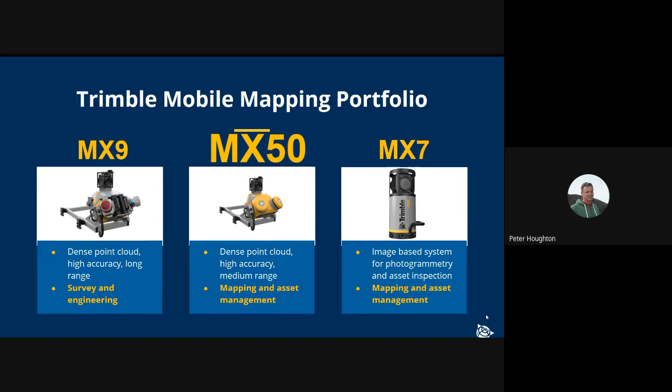So this is our new product. The Trimble MX50 was launched on the 12th of July, and we're going to specifically focus on this product during this session.

So just a little bit more about our portfolio. Trimble has a portfolio of mobile mapping products with a variety of applications and price points that we believe would be interesting for many different kinds of users. If you look at the application, as mentioned previously, MX9 is for high-end surveying and engineering, the MX50 for asset management and mapping, and the MX7 for imaging for those people that want to collect a type of street view kind of workflow.

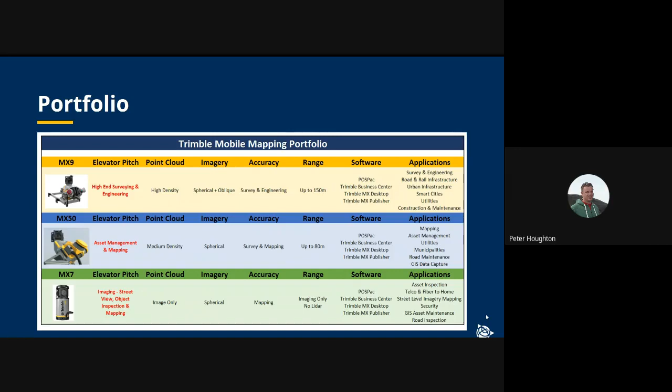If you look at the columns just in from the right hand side, it indicates our software and workflow for each of these products, and an important point to make is that we have the same workflow across our portfolio.

So no matter which product a customer selects, the workflow is the same. This is very important because it means that, for example, somebody that has an MX9 and would like to add an MX50 to their fleet doesn't need to change their workflow. It's exactly the same as it was with an MX9 or indeed an MX7.

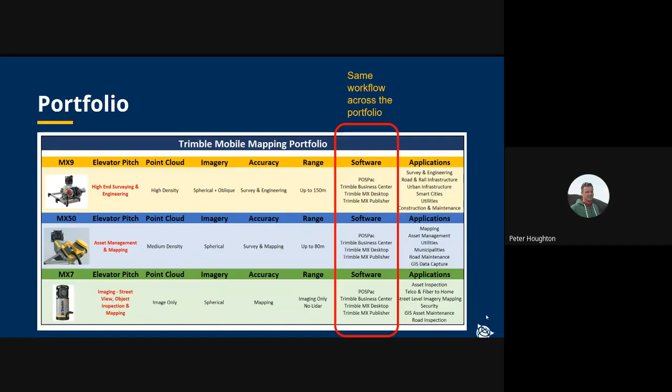So a little bit more about the workflow. We consider 4 steps in the whole field-to-finish workflow: capture, process, extract, and share. These are the 4 steps in our workflow, and just to indicate what that means in practical terms.

In the field, we have our TMI field capture software for all 3 products. The customer simply needs to connect to whichever system it is with the mobile device, usually a tablet, and there's a very simple process for connecting with a web browser to the system and capturing the data required in the field.

That data, once the mobile mapping mission is complete, is transferred to the office, and it goes primarily to begin with in Trimble Business Center, or TBC. In that software, people can do all the basic stuff they need to do with the raw data, so they can process the trajectory, generate point clouds, do things like registration, run-to-run or registration to control points, point cloud colorization, image blurring, and then export the processed data.

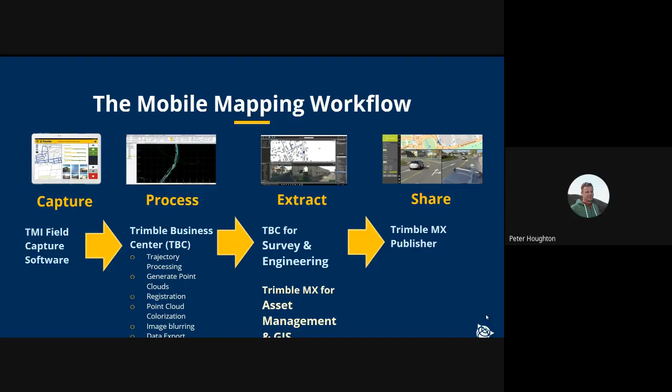So I come back to these 4 steps again: capture, process, extract, and share. Let's just have a look at that in a bit more detail with some examples.

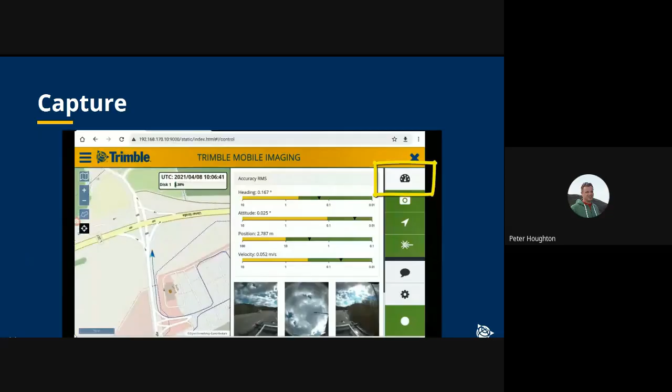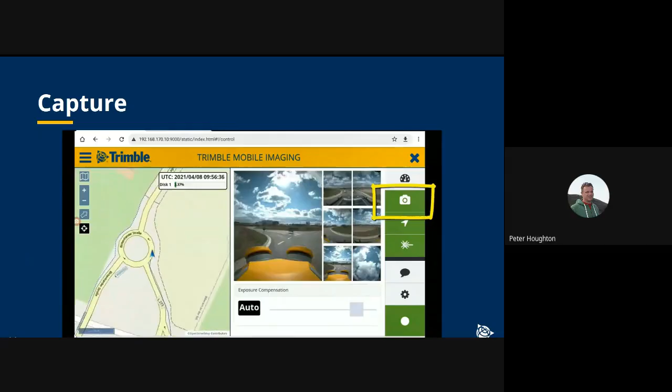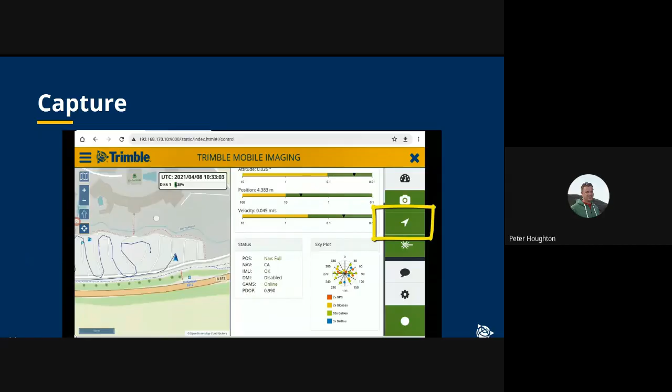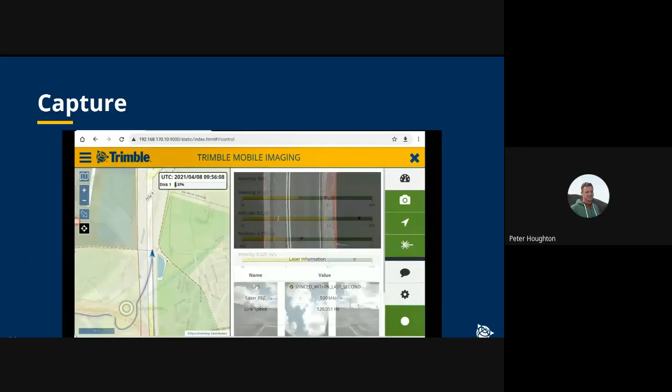And then when a customer is ready to start recording data, they can simply start that run by pressing the button in the bottom right, and it turns to red, which means you're in recording mode, and the data is recorded. When you want to stop a run, you simply press the red button in the bottom right corner.

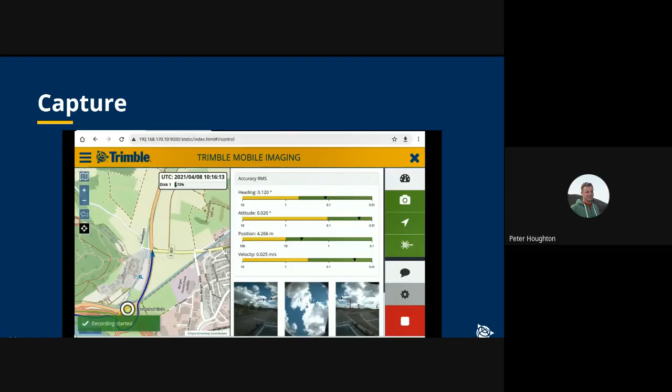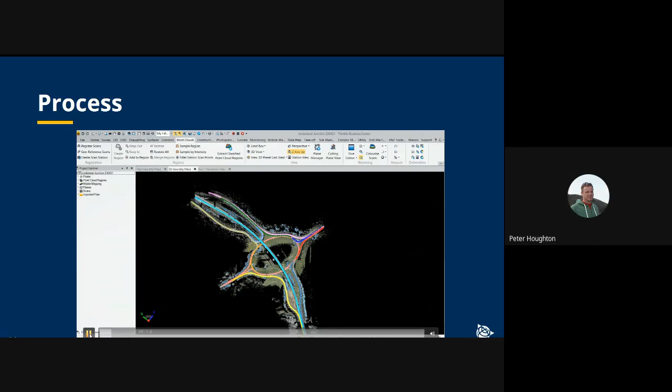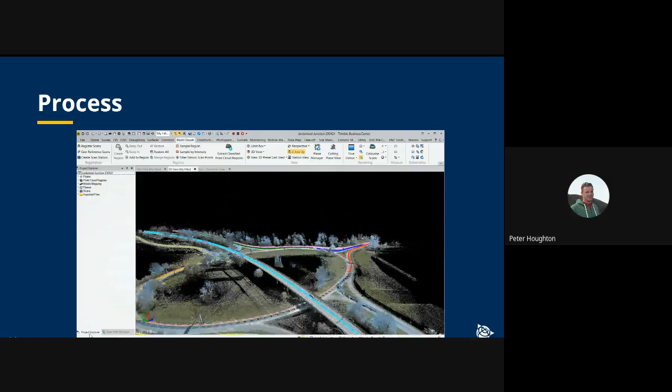Process - so this is some data that has been processed and is in Trimble Business Center. So all the steps have been followed here to generate this point cloud. The trajectory has been processed, scans have been generated, runs have been registered to each other, the point cloud has been automatically classified, and the point cloud has been colorized using the imagery.

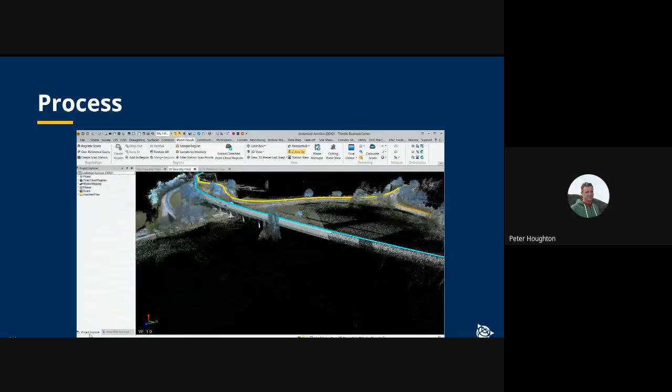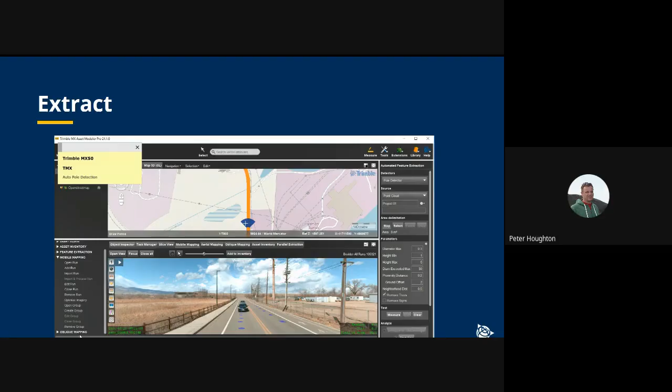Extracting the data - so this is an example of TMX. This is just one example of the kind of thing you can do in TMX. There are plenty of different data extraction options in TMX, from manual workflows to semi-automated workflows. The example I'm showing you here is a pole detector for automatically detecting poles.

So in the top window, I'm creating an area of interest, and I want this automated routine to look for poles within that area. So you'll see in the top window, it starts to populate the poles that are detected, and this is automatic. Then if we review in the bottom window, do a kind of virtual drive-through of the environment, you'll see that the poles detected are displayed in the image view also.

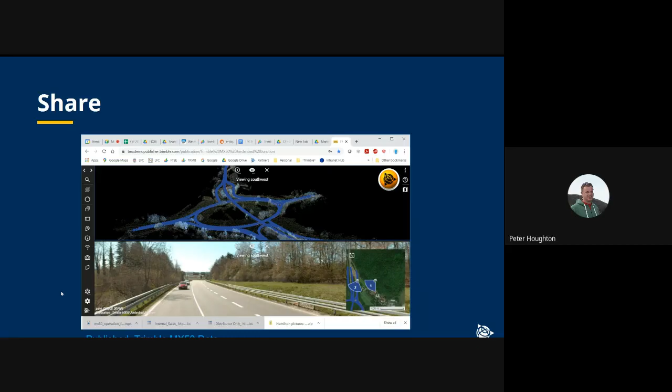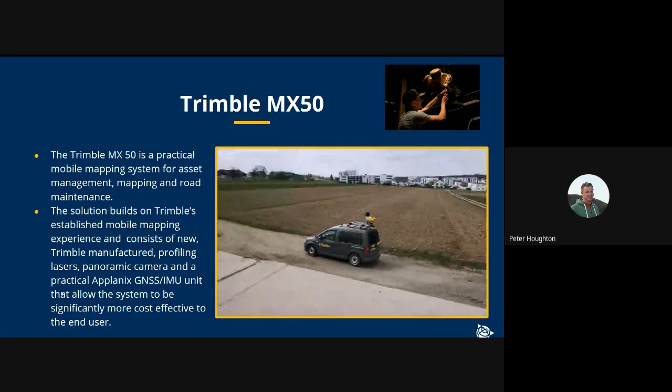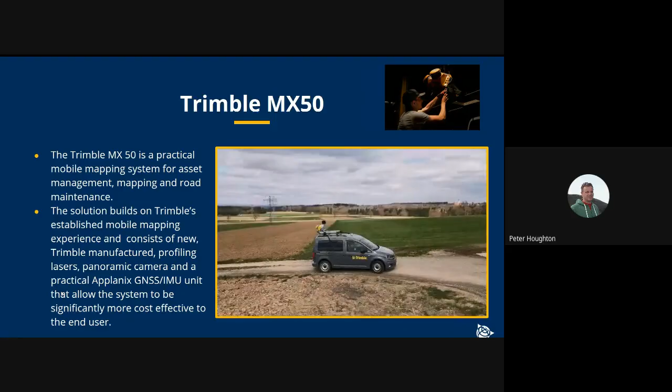So a little bit more about the MX50 product, which is new. The MX50 is a practical mobile mapping system for asset management, mapping, and road maintenance. It builds on our experience in mobile mapping. One of the main features here is that for the first time in a mobile mapping system, we're using Trimble designed and manufactured lasers on this product. So there's no third-party lasers. These are Trimble lasers. There's a 360-degree camera and an Applanix GNSS IMU unit.

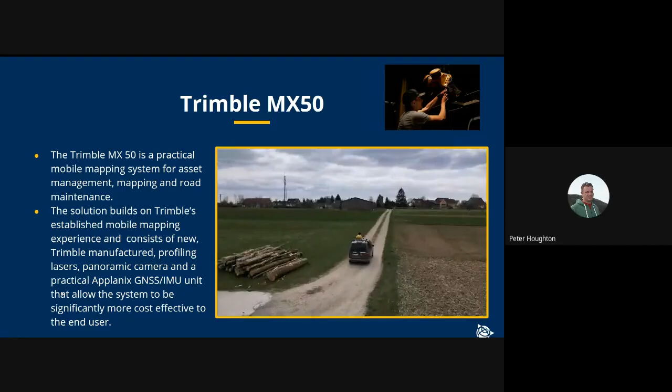And we believe the system to be significantly more cost-effective to the end user. So here's the system overview, and these are the components of the system. So there's the sensor head itself, a roof rack, a control unit, and a power unit. There are two laser profilers arranged in a butterfly configuration, each measuring at 480 kilohertz and rotating each at 120 scans per second. We have a 360-degree spherical camera. We have GAMS, which is a secondary antenna for aiding the heading determination of the system. And yeah, there's a single cable connection from the vehicle to the sensor head.

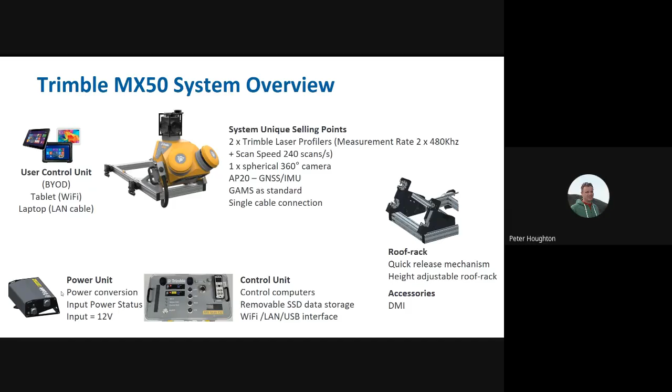So this is what the system looks like in general terms, and these are the components. So there's a roof rack which is supplied with the system. Then there's the sensor head itself with its 360-degree camera, lasers, and IMU GNSS system. Secondary antenna for aiding with heading can be installed. There's an optional DMI, which is a distance measuring instrument that fits to the wheel of a vehicle. That's optional, but can be recommended in GNSS challenged environments, let's say.

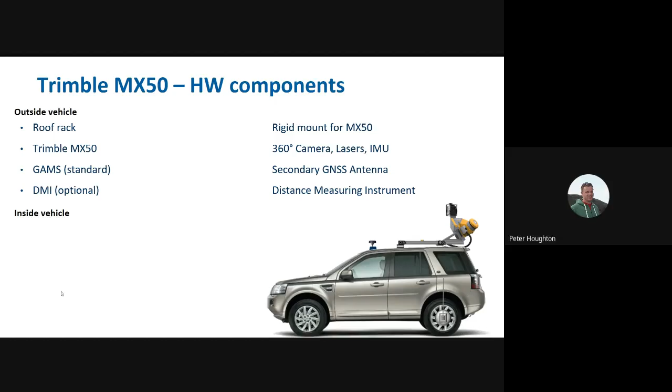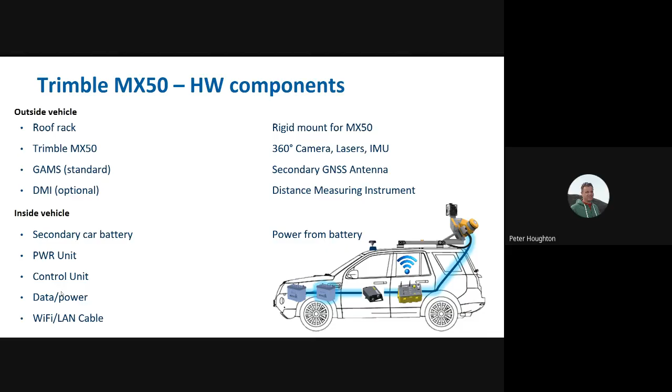Inside the vehicle, we normally recommend installing a secondary battery to the main car power supply. And this is connected to our power unit, which connects to our control unit, and that connects to the sensor head itself. We create a Wi-Fi hotspot within the vehicle, and then the user connects with their own device, whether it's a tablet or a PC, to the system and operates the system from a web browser.

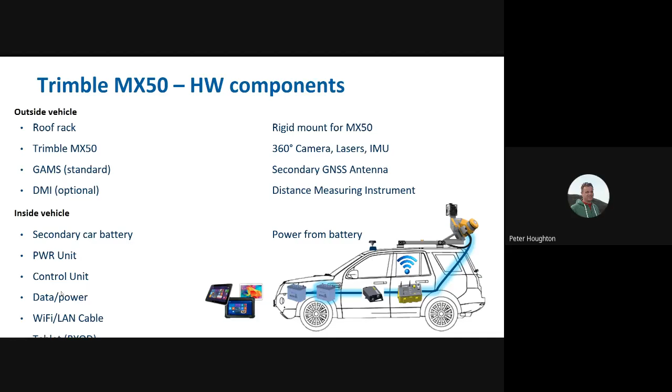Some of the specs of the system - there's quite a lot of information here, but I'm just going to highlight the main features. So we have 2 laser scanners and a Ladybug camera. We have the Applanix AP20. The weight of the system is 23 kilograms, which is significantly lighter than some of the previous systems. The effective measurement rate is 2 times 480 kilohertz with a scan speed of 120 scans per second. What does this mean? Effectively, this means that we're collecting approximately 1 million points per second. The maximum range of the system in terms of the lasers is 80 meters.

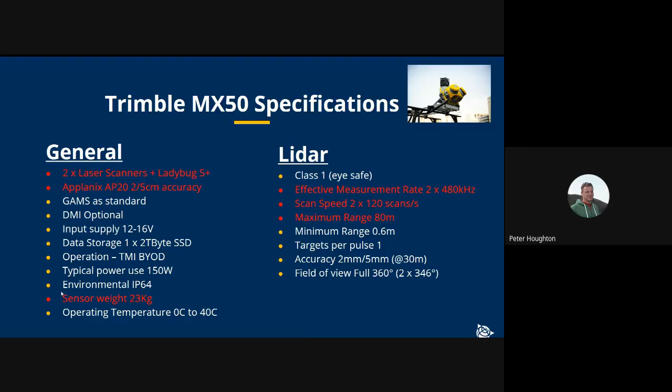A little bit of a look at some of the data we've been able to collect using the MX50. We have this well-defined data corridor. The range is 80 meters, meaning we get approximately a 160 meter wide corridor, 80 meters either side of the vehicle's trajectory. This is a hard cutoff at 80 meters, not a potential maximum range. It means we get a very clean data corridor, without long distance points that could be less accurate because they're dependent on the accuracy of the heading determination. We really focused on a concentrated area of interest of this 160 meter data corridor, and to some extent this is almost an advantage.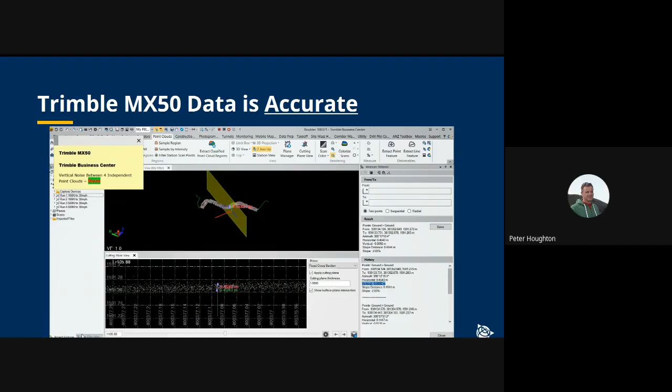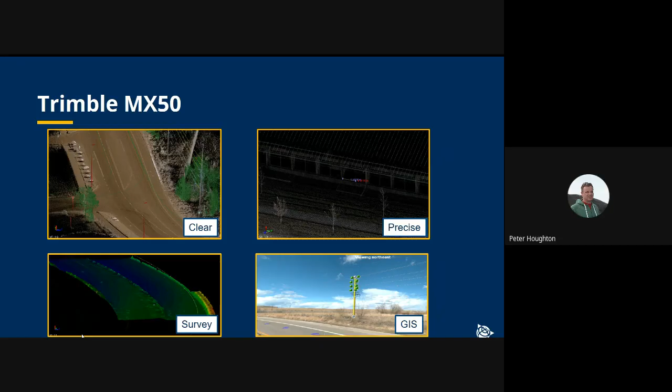That's why we believe this product will be interesting for people interested in measuring road surfaces, because we're getting very good data on road surface. So the data from an MX50 is clear, it's precise, it can be used for survey, and it can be used for GIS.

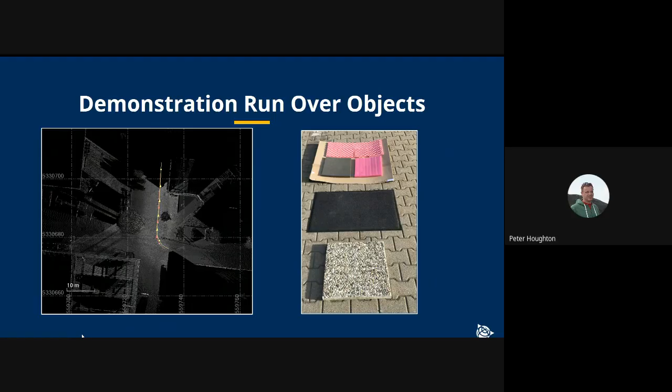Here's another demonstration of the fidelity of the data. We put some objects in the road: a piece of cardboard, some pieces of foam, a carpet tile, and a concrete slab, and drove over them with the MX50. This is the resulting point cloud. You can see the objects appear very clearly, and we were even able to measure the depth of the carpet tile.

MX50 data from a small project we did close to our office in Germany. It's a road intersection, quite a complicated one. There's a roundabout with several different entrance roads and actually a flyover. The cyan colored trajectory across the center is the flyover. So, a reasonably complex road junction, and I'd like to share some of the data we got from this project with you.

This is the size of the project: approximately 1,300 meters by about 570 meters. There are 11 runs, including a flyover, and the total distance was 5.7 kilometers if you add all the runs together. The time it took to do this survey was 50 minutes, so a very fast way of doing a survey, that's for sure.

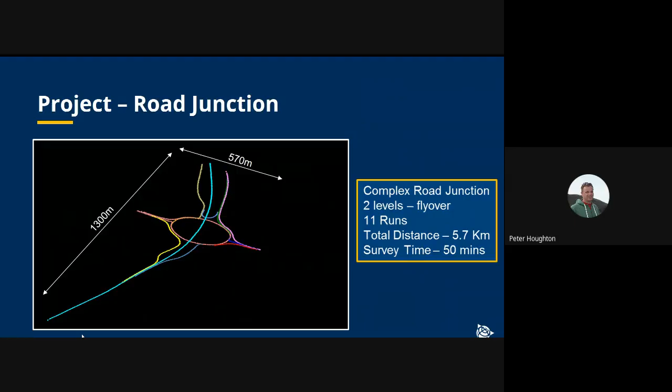I just want to share something from my own experience. I did a similar survey way back in my young surveyor days. Total stations had been invented in 1987, and we used one on a similarly complex road intersection in West London. That project, due to its complexity and the busyness of traffic, took us 2 months. So in the course of my career, we've gone from 2 months to 50 minutes.

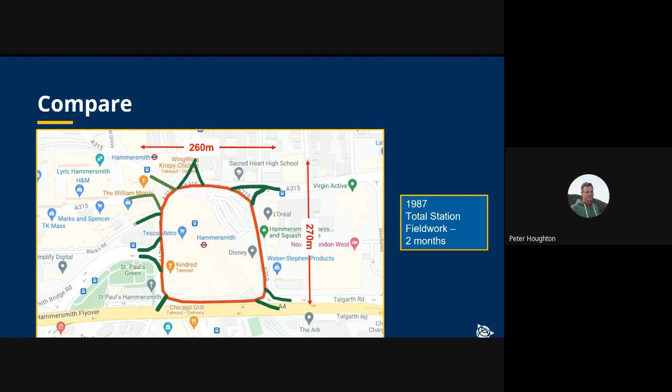So we registered the runs together in this project and classified the point cloud into buildings, ground, high vegetation, posts, signs, and power lines. This is a feature in Trimble Business Center where the point cloud can be automatically classified into these five regions, and then the data was exported to TMX. Let's have a look at the data.

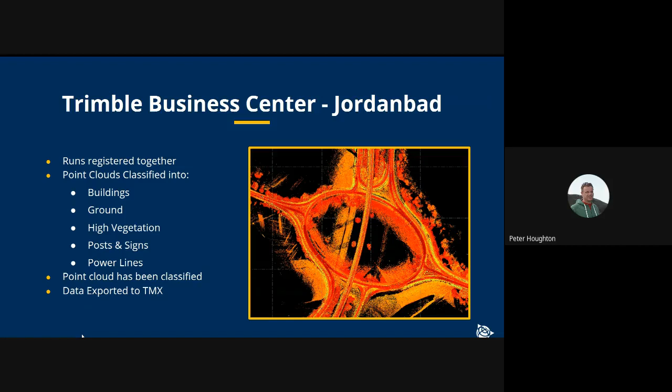So this is the colorized point cloud. You see the vegetation and the ground surface very clearly indicated. Being able to switch off different components of the point cloud to get to the ground, so just having the ground switched on, is very useful, for example, for creating a DTM of the ground surface. To be able to filter the data in that way is very useful.

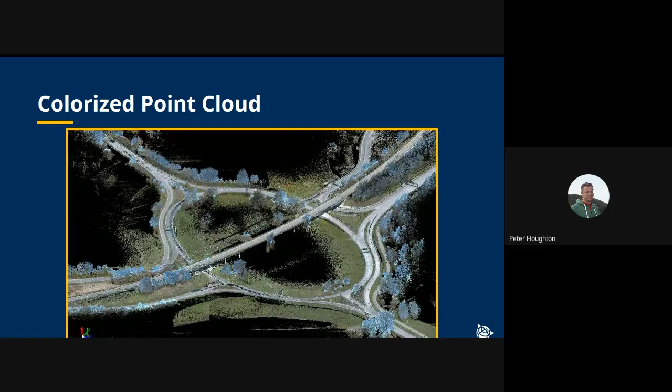Here's a view of the resulting colorized point cloud. Another view, you see the flyover going across the center of the project.

This is a view on the roundabout section of the project, where the vehicle's probably traveling about 40 kilometers an hour going around this section, and this just helps you understand what the data looks like. You'll see the grid pattern created by the two lasers in the butterfly configuration gives us around about an 8 centimeter grid pattern on the road surface itself.

You'll also notice the data on the road surface is very clean and there's very little noise.

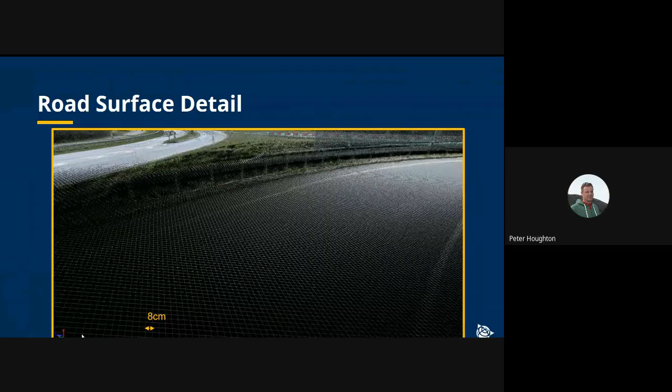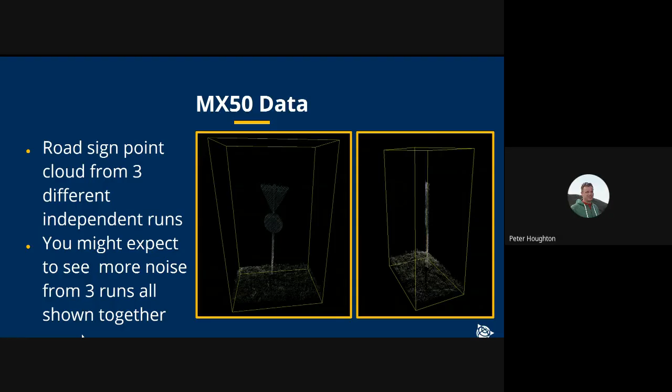Just want to say a little bit about Trimble MX Publisher and some of the plugins that are available. We have several plugins. I want to focus on the ESRI plugins here.

So different projects are basically created and become publications, and these can be published over the internet and shared in a web browser. And we have a plugin for ArcGIS or ArcMap, and I want to just share with you some of the features of that.

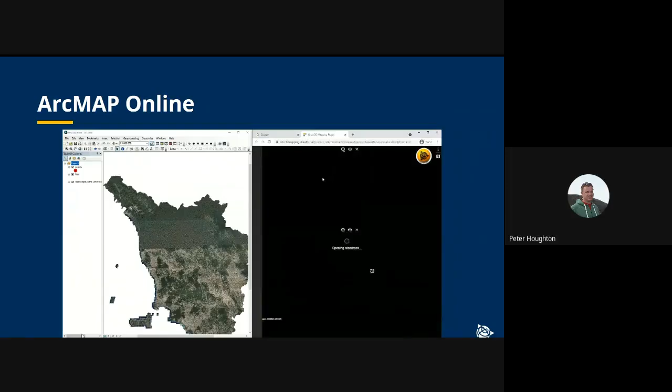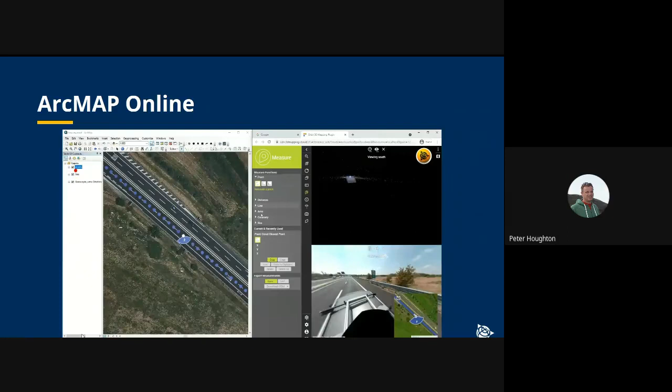So here we have on the left window, we have ArcMap, and I'm connecting our plugin to our publisher platform with a project. So now we have a connection between ArcMap, the ESRI world, and the TMX Publisher, the Trimble world, on the right. And now I'm going to extract some points.

You'll see the vehicle trajectory is displayed in ArcMap, and I'm extracting now some road sign on the right hand side from the publisher platform, and you see that it's been extracted, created, and saved interactively to ArcMap Online.

Just moving along to another road sign, extracted it in Trimble MX Publisher. It appears in ArcMap on the left-hand side, and I can save it to the ArcMap database.

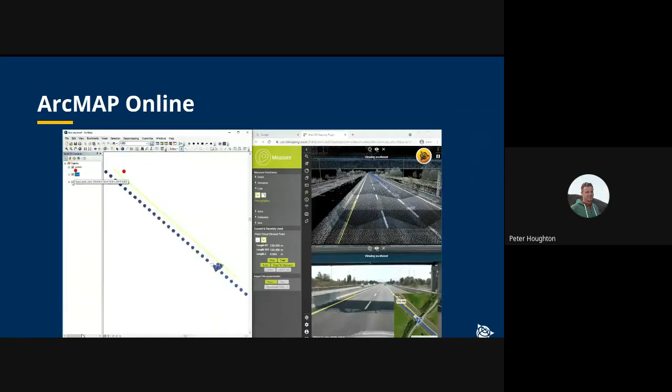Now I'm going to do something similar, but this time extracting a line feature. So it's actually the road marking, the line across the left-hand side of this lane. So you see this has been extracted in the point cloud in MX Publisher, but you'll see the line appearing in ArcMap, and it's extracted to a layer in ArcMap and can be saved to the ArcMap database.

So there's this constant real-time connection between TMX Publisher and ArcMap Online. We can also just show you some of the features available in Publisher.

We can add annotations. So here we're just adding an annotation to say, here's a bridge, appears in the point cloud and in the image.

And then I just want to show you some measurement tools as well. So if I pick up the measurement tools, just show you one for doing offset measurements. So here, measuring a kind of right angle triangle with slope distance, horizontal and vertical offsets to that point on the bridge.

And then finally, measuring an offset, measuring this lane width here, simply by measuring an offset.

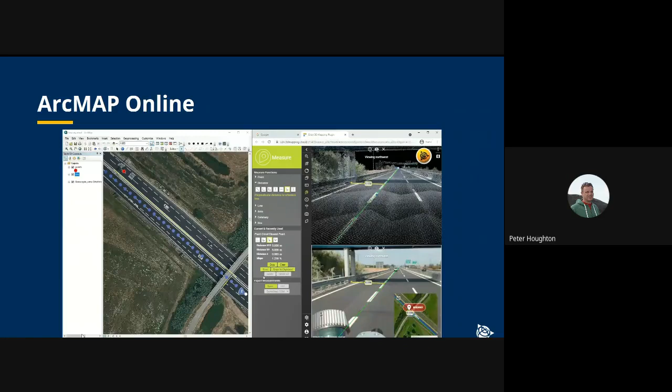So I hope that gives you an idea of how mobile mapping data using TMX Publisher can be used very smoothly in the ESRI world.